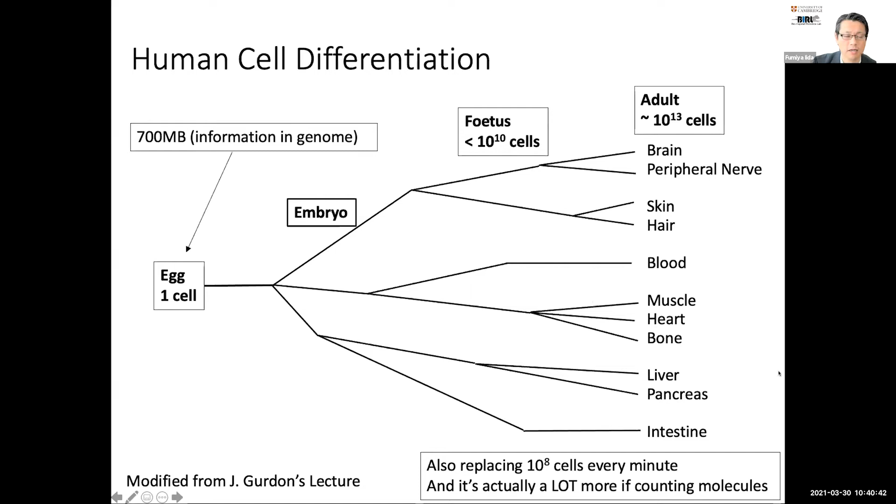So how can we think about such a system in engineering ways? That's my starting point for robotics, the bio-inspired robotics research. So if we need to think about how to build robots, we really need to think about the scale.

First of all, our human body is incredibly complicated. If you count cell by cell, the numbers are equivalent to 1 million times more parts than an Airbus A380, which is probably the biggest robot we can build at the moment. And this is not enough, because we also need to start thinking about how we're replacing cells all the time while we are alive.

Another interesting thing we learn from nature is the amount of information in the human genome. This is the blueprint of the design of this complex system, but the amount of information in this genome is a lot smaller than we actually think.

Let's do a simple math here, dividing the number of cells by the amount of information in the genome. It gives us roughly 1 bit of information in the genome being in charge of the design of, on average, about 1,800 cells. This basically means that the genome is not really telling our body exactly how it should be built, but it's only guiding the direction of growth in the building process.

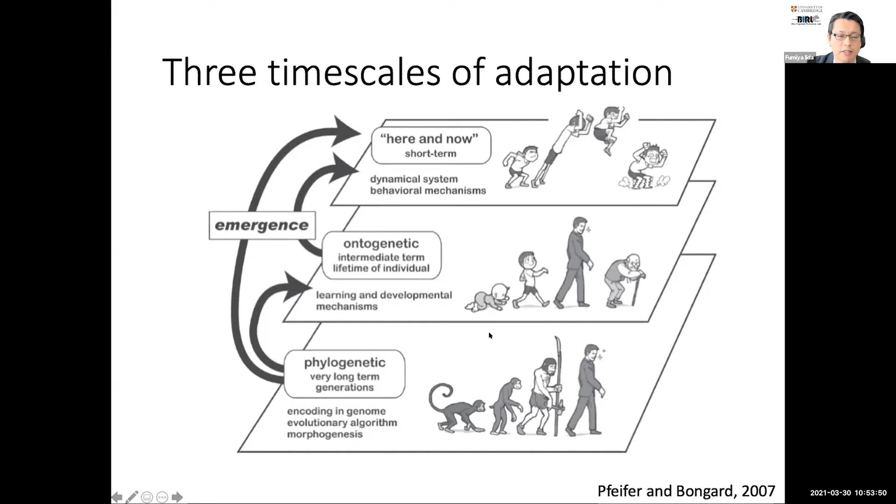But what we really want to see in the next step is how we can bring it to the real world, right? How we can make it a robotic system. We see a lot of interesting patterns, but these patterns are not really like animals or robots so far. So we want to think about a little longer time scales. We've been looking at a here-and-now time scale, but we want to bring it to a growth process or evolutionary process in a more interesting manner.

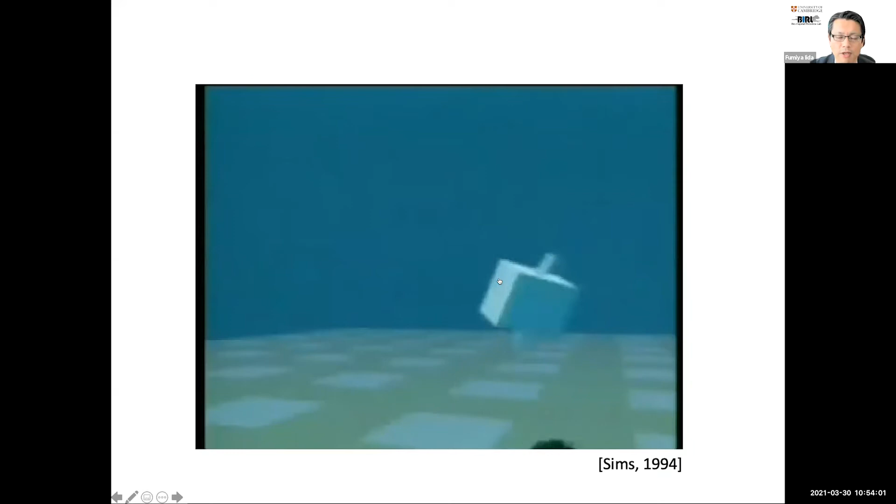So one way to do it is using computer simulation. We can apply a similar principle, like Game of Life, to the computer simulation, so that a computer can come up with many different kinds of robots like this. The patterns can be evolved through lots of trials and errors in the evolutionary process.

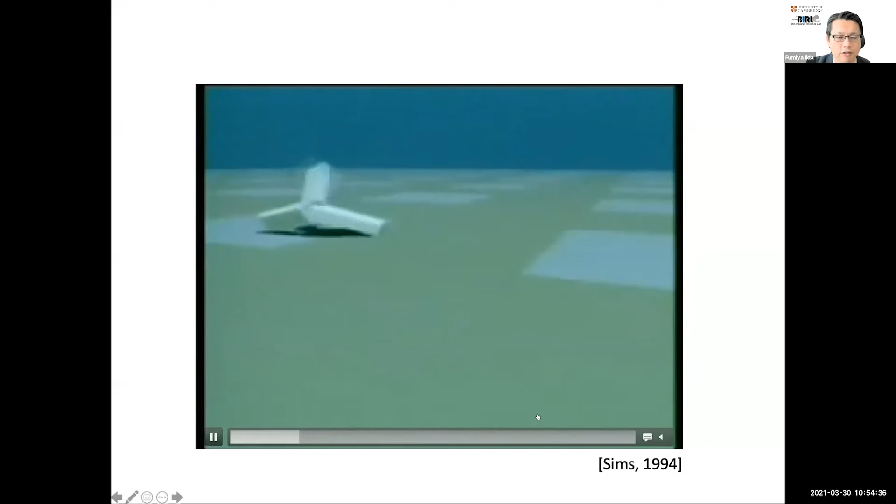So here, all these virtual robots were created in computer simulations almost 30 years ago, but they were made without human designers, right? The virtual evolutionary process can actually make robot-like creatures in a virtual environment, and there are so many different kinds of interesting virtual robots here. I also recommend you look it up on YouTube to see how they actually did it.

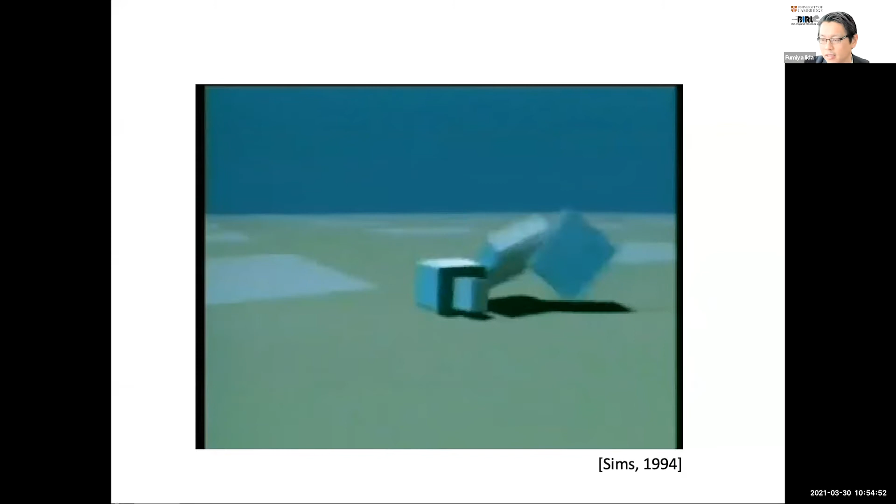The trick that makes this evolution happen is, of course, inspired by the natural selection process proposed by Charles Darwin, also a Cambridge alumni. So the idea here is basically the principle of survival of the fittest.

So the question now is how we can bring it to the real world system. The robots we saw so far are all virtual, computer simulations, but we want to bring it to the real world. This is one of the main research challenges we have been working on in the last 5-10 years. This sounds like a really complicated challenge, but it's not impossible if we think of some technological advances.

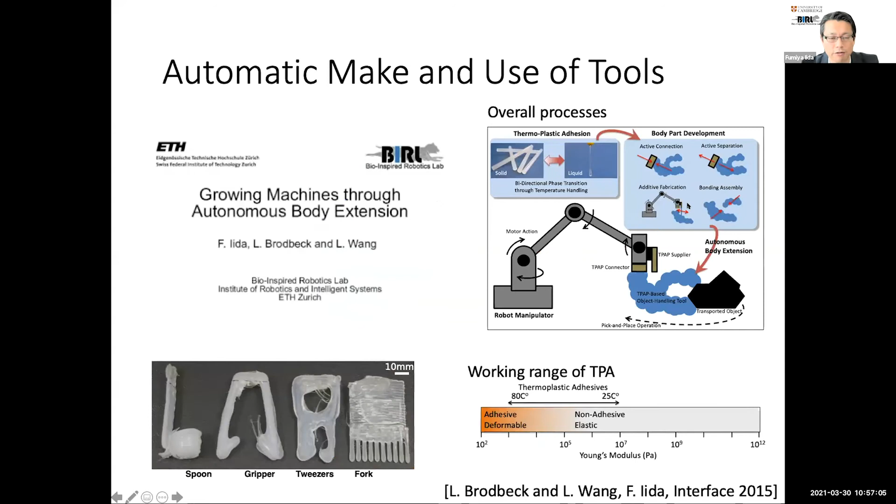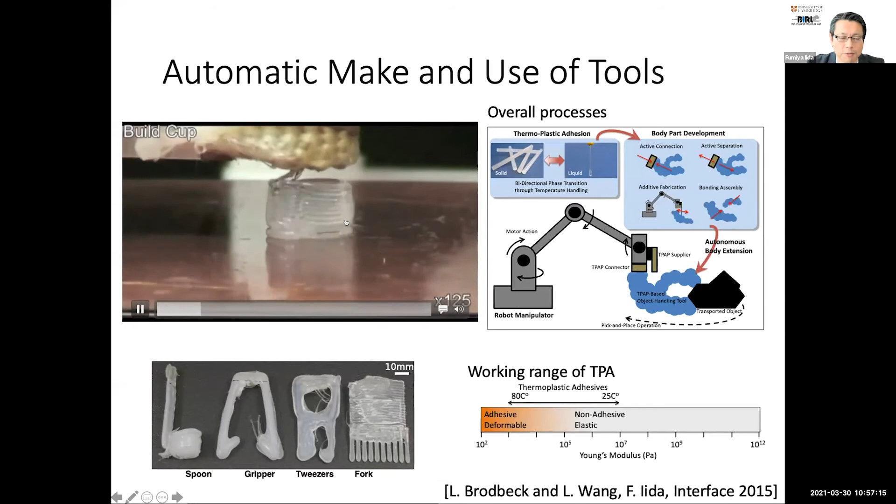So one way to achieve this is the first version of mother robots. This is equipped with an end effector, a 3D printing end effector that can automatically create different kinds of mechanical structures.

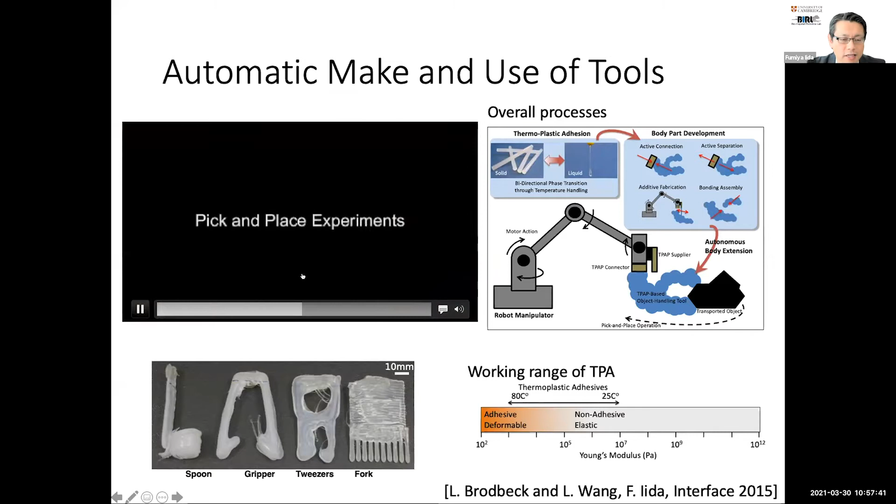So this robot is able to make cup-like structures and a stick-like structure, and put them together by bonding them. And then the robot can actually make a spoon in the end effector so that you can do things like water transportation from one dish to the other.

This is a very powerful 3D printing approach. The robot is able to make very different kinds of mechanical structures at the end effector, like making a big tweezers or small tweezers, or fork-like structures. This is a really big step forward, because the robot can actually change its own shape automatically without human designing, without a human building a mechanism for this robot.

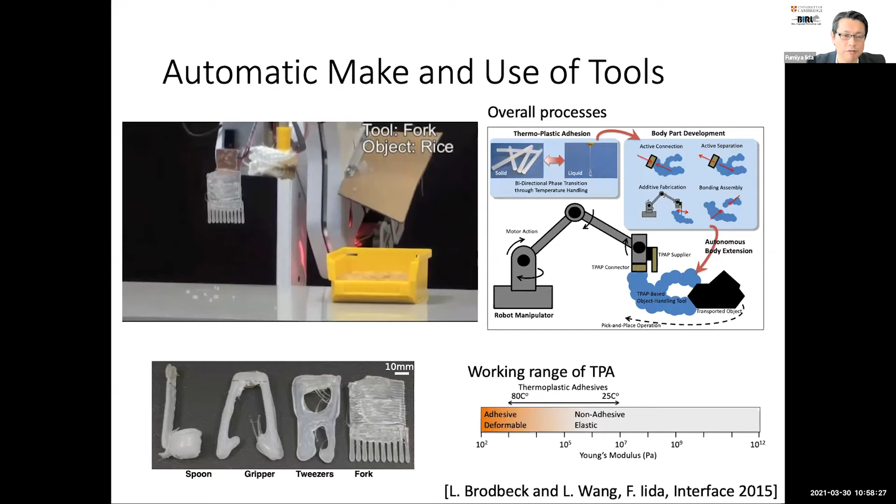The breakthrough of this research was actually done by material research. The material we use for this robot end effector is the so-called hot melt adhesive, a polymer that can change its strength and adhesiveness by controlling temperature. So the robot can actively change the mechanical structure by applying heat and some motion principles. This is a really good start to make robots' mechanical structure more dynamic and change it over time.

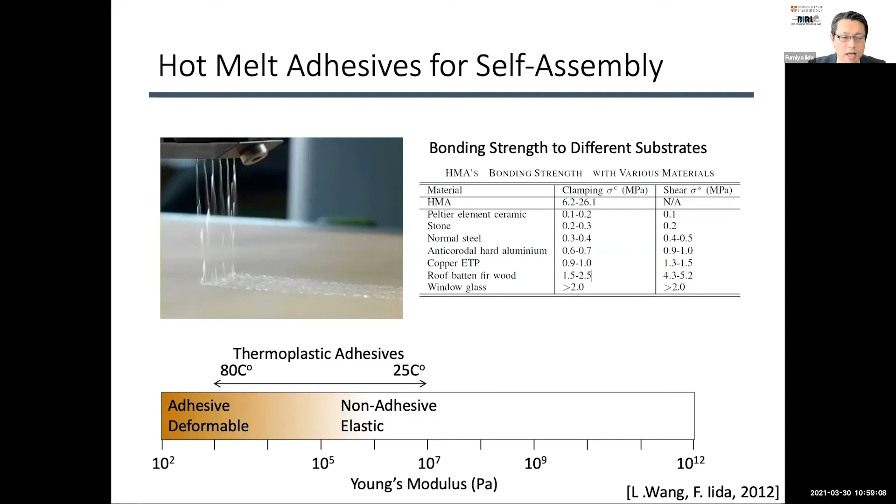But of course, the next challenge is how we can automate the design process itself. The robot can change the structure, but how the robot can design the next generation is the interesting question. So what we did next is build a second version of mother robot that is able

to manipulate a variation of objects, and put them together into different shapes to make the child robot. This arm is the mother robot, and these modules, the rods made of modules, are child robots. Once a child robot is made, it can be put in the experimental arena and tested in the physical world. So what this mother robot is doing is making all different kinds of designs of child robots, and measuring the performance of the child robots.

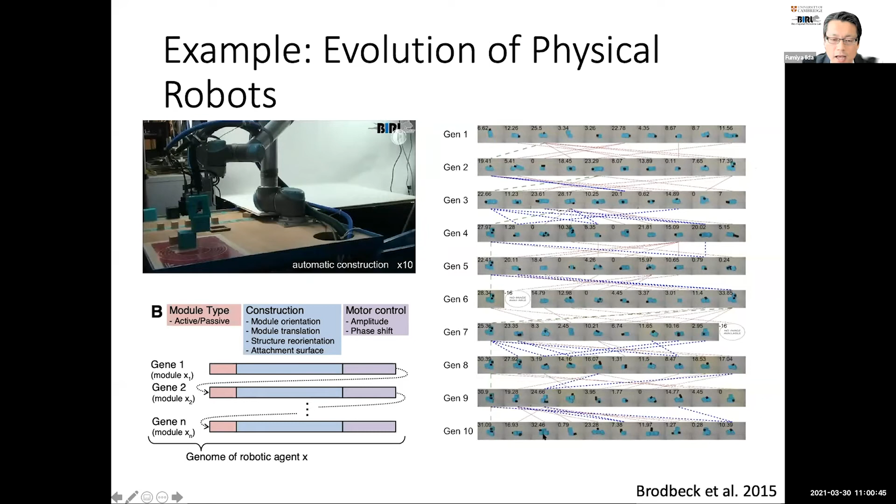And then make another set of 10 robots in the second generation, and so on and so forth, repeating for 10 generations, building 100 robots. We usually see the performance get better compared to the original versions.

Just to give you some examples, this is the evolved robot from this evolutionary process. The mother robots usually start with smaller robots like this. It already moves a little bit, but of course, the mother robot can make much larger robots like this. The larger robots can move faster, and therefore are better fitted in the evolutionary dynamics.

And we can actually see the evolution of physical robots in this way. This is really exciting because humans are not really designing this robot, but the robot is designing robots, and that's the kind of very fast breakthrough we can make to achieve this kind of physical

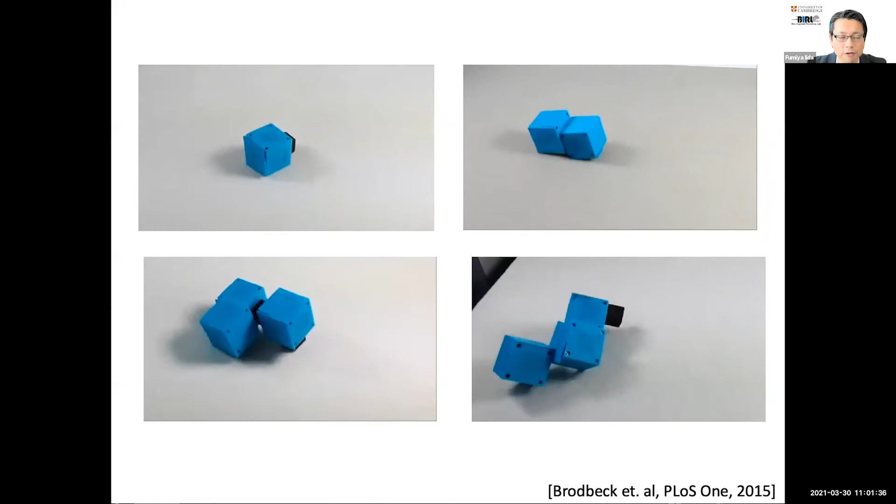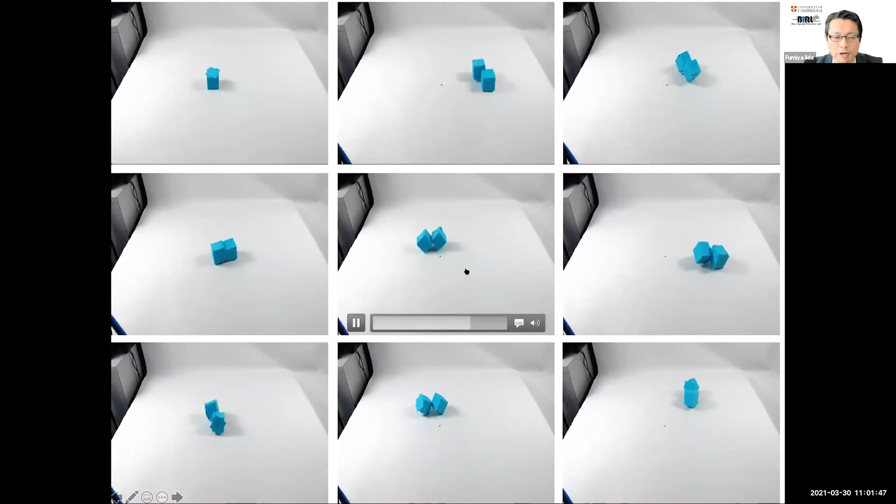evolutionary robotics starting point. But obviously, there are lots of dead bodies behind this evolution. All of these robots are not performing any locomotion. These are species that die out in the evolutionary process, but this is a necessary process in evolution to make better results in the end.

So I hope you have a bit of a flavor of how robotics research is moving more and more towards robotic systems. I just want to give a bit of brief history of myself.

I started my robotics research in the 1990s, making very conventional robots. This is a face robot I built the first time, which took like 1 to 3 years to make one of these robots. Therefore, we could only explore 2 or 3 different types of robots.

And when I started my PhD in 2000, building one robot took about 3 hours, so we could explore lots of different kinds of robots, about 30 to 50 different types during my PhD. But now in 2010, one of these robots can be built in something like 30 minutes.

And the latest version we have, we're able to build in 1 minute. So we can actually try different types of robots at the scale of hundreds to thousands of different robots. I'm really excited to build many different kinds of robots, just like evolutionary dynamics produces in nature.

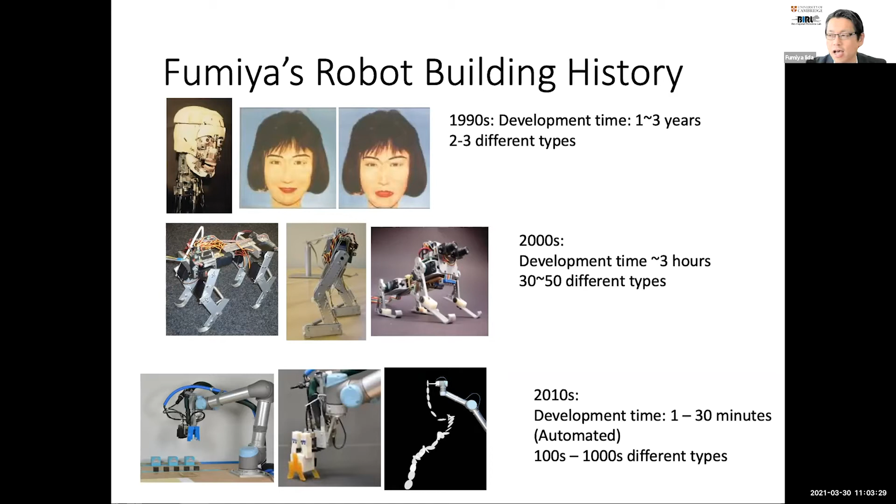So I just want to give you a bit of a summary of my lecture today. Complex systems represent a really groundbreaking, fundamental challenge in engineering, but we have a lot of new technologies such as 3D printing or actuator sensor materials, and lots of engineering efforts put together into making more and more complex robots, and that's why we're able to do things like evolutionary robotics. But we need a new design paradigm. We cannot really build future machines by hand all the time, but we need some automated self-organization process in the design and fabrication of future machines, and that's what we are interested in.

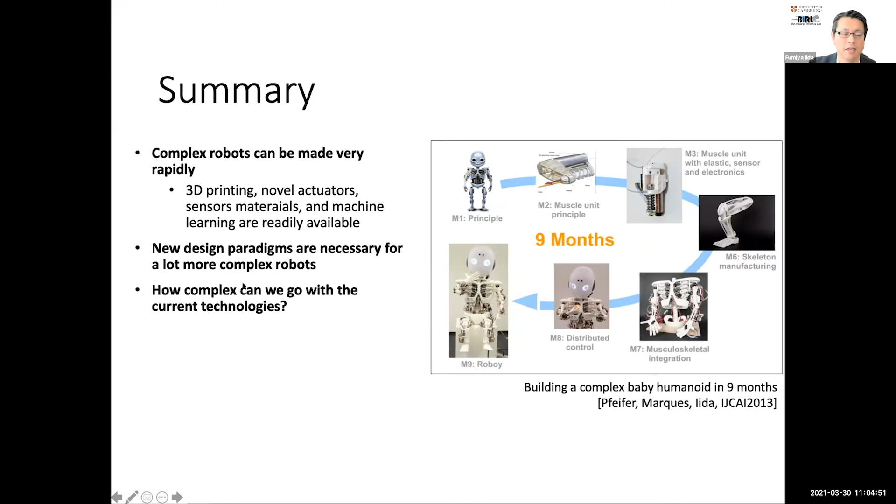Hopefully at some point in the future we can make complex systems like ourselves. One of the challenges we undertook is trying to make a humanoid, a baby humanoid, in a 9-month period, just like human development in the early stage of our life. That's something we are really looking at. So we still don't know how complex we can go eventually, but I think that's a really interesting challenge in the end.

We have lots of collaborators in this research project, and this research is possible because of my very talented Cambridge students, and I'm hoping that you can join our research project in the future. If you're interested in more details of my research, please feel free to visit our website or send us emails. You can also visit our homepage to see more videos of our research projects. With this, I'd like to stop my presentation and open the floor for the question and answer session.